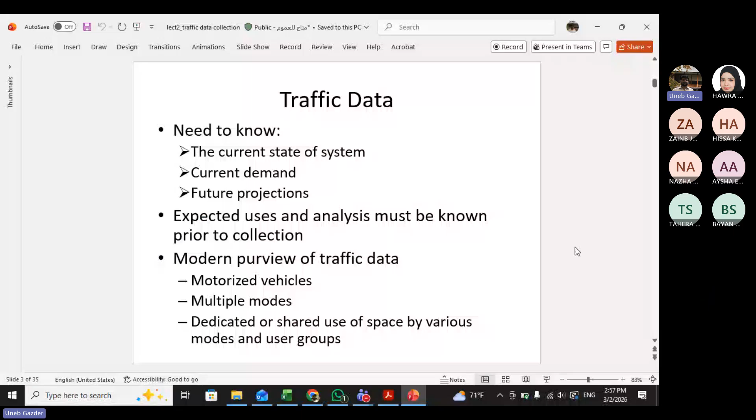We started the topic of traffic data collection. We looked at some of the sources and studies, and we covered a lot of them. Some of them were asked today as well in the quiz.

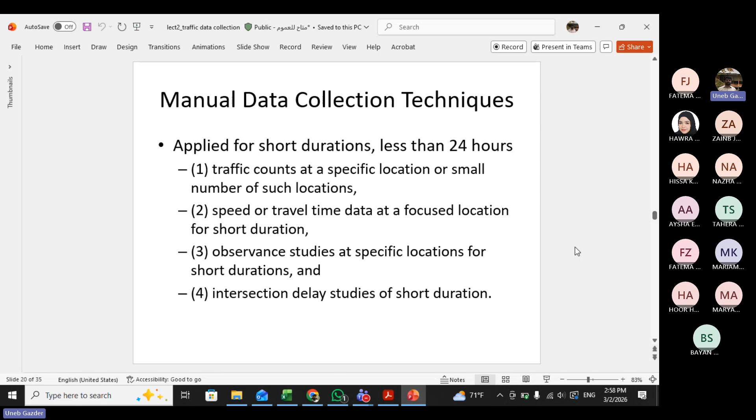We have three methods of data collection: manual, semi-automated, and automated. Manual studies are limited because the accuracy level is lower, so if we continue it for longer times, the error increases or multiplies. So manual studies are short and can be done for specific purposes, which are mentioned here.

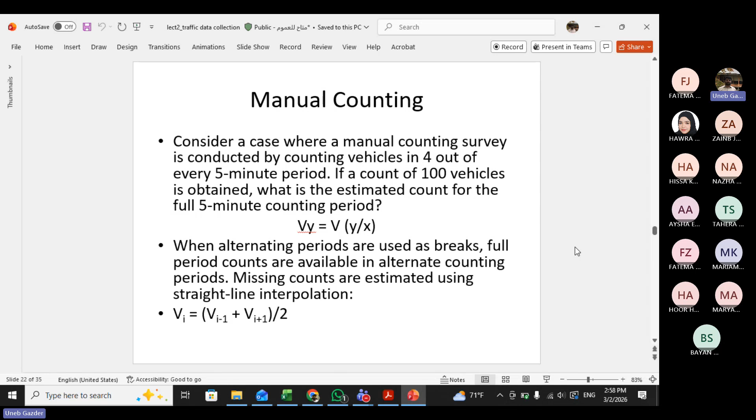We were talking about manual counting. Within manual counting, we talked about the concept of breaks. The breaks can be within the counting period, so a longer counting period, a shorter break period, and there's a total period as well. It can be alternate, so counting and breaks are of the same value, like 15 minutes of counting, 15 minutes of break, something like this.

We moved on to this example where we have two people counting 4 lanes. I told you if you do it lane by lane, the chances of errors are less because vehicles pass one by one, but the problem is we have fewer observers. So what they did was make a plan: 12 minutes counting for one lane, 3 minutes of break, then 12 minutes of counting for the other lane.

What I asked for last time was that you convert all these 12-minute counts to 15-minute counts. So you multiply these values, divide by 12, multiply by 15, and then fill in the missing values using the method of average. I told you how to fill in the first and the last value as well. So can somebody give me the values?

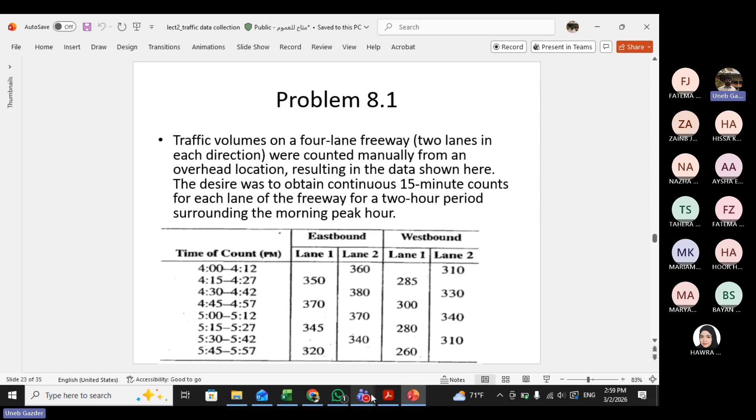The filled, complete table - somebody did that. You can simply share it on Teams. Somebody did the full table, the 15-minute counts and the filling in of the missing values. Does somebody have it?

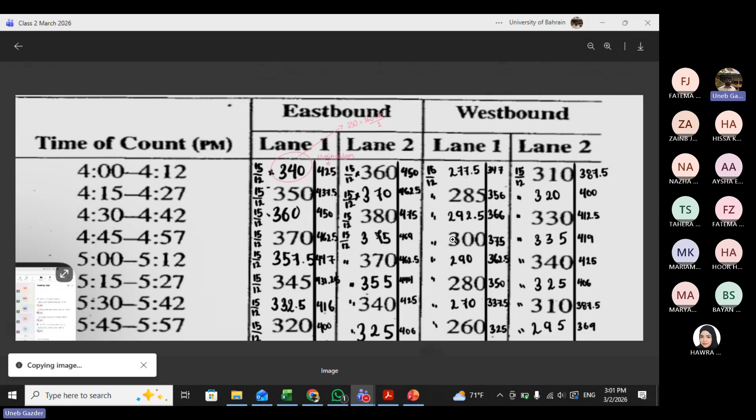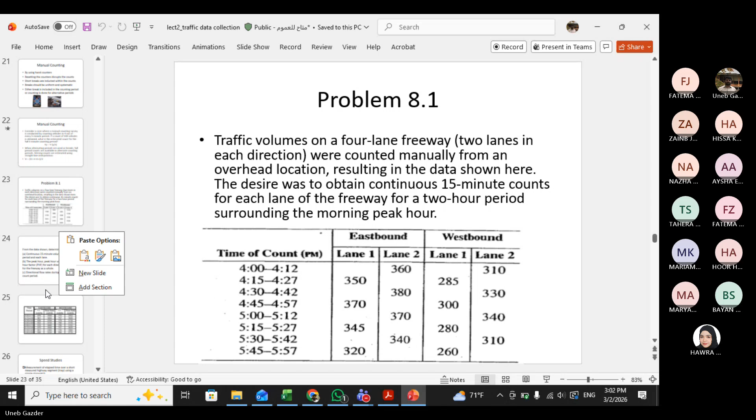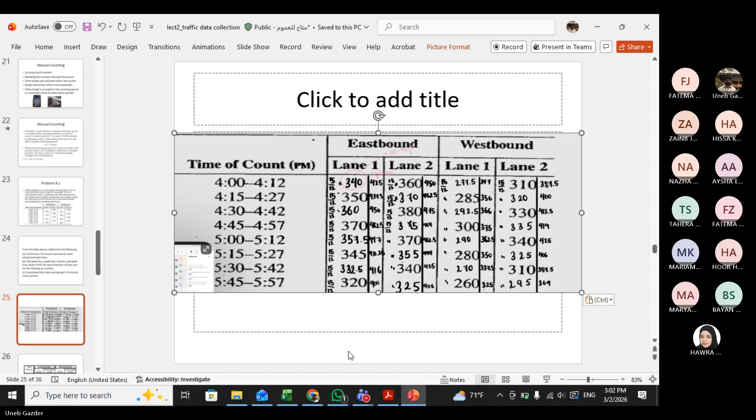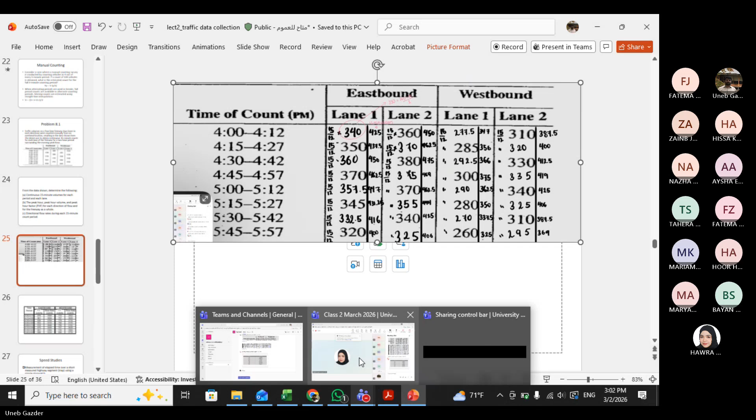You can still use it, copy it. Let's see. Okay, so these are the values you are talking about, the small ones. What is this?

What is this? Okay, the full question you mean? Okay, thanks for that. Okay.

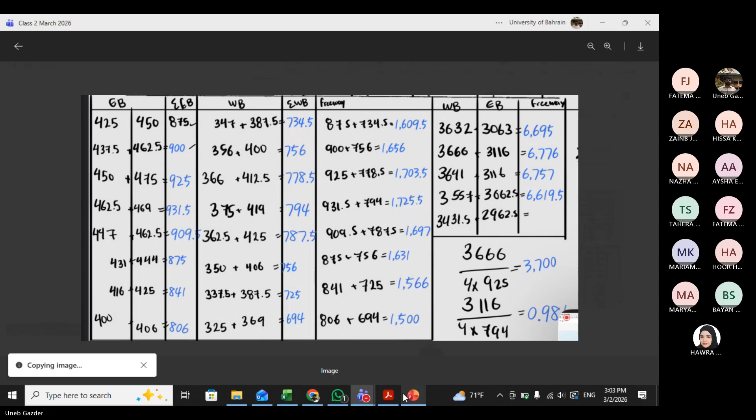What I can do, okay, for the others, I will recommend them to do it. But what I will do is explain the procedure for the remaining items, and then you can do it on your own whenever you have time. Okay.

Just checking if somebody else has it. Okay, no one else. Okay, so thank you, Bayan, for doing this. It's a great help, it helps me move faster. I'm always happy to skip around something like this.

So after doing the calculations I explained last time, you have values for every 15 minutes. So each of these values is for 15 minutes. 340 is from 4 to 4:15. Sorry, 425 is from 4 to 4:15, and 437.5 is from 4:15 to 4:30. So the values you see here are all for 15 minutes.

So she converted all the values using divided by 12 multiplied by 15, to get 15 minute values, and then found some of the missing values. Before doing this conversion, she did the missing value calculation.

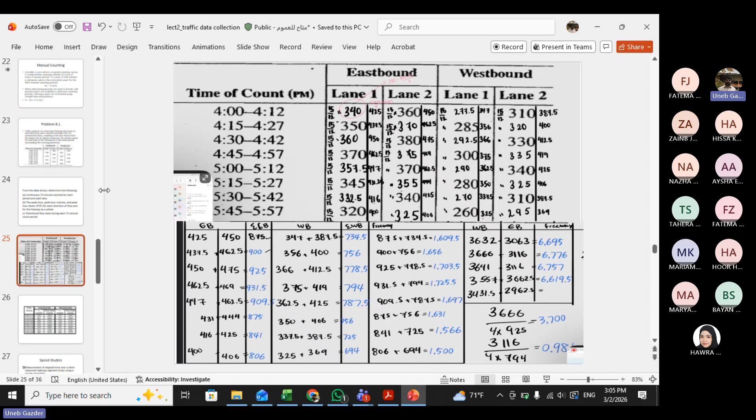So between 330 and 310, she found the missing value. Once you have these two values, you can find this one, because 310 should be the average of 295 and 325. So if you are missing the extreme value, you look for the previous two values and apply the formula of average. Okay, so once that's done, what happened?

Okay, pay attention now. It's very important. Once you have these values in the small columns, the next part of the question was to find out peak hour volume and peak hour factor for each direction and for the combination of both directions.

So freeway is the combination of both directions. What is done here is each of these values in the small columns is for each lane. Each direction has two lanes, so when you combine two lanes, you get the full of that direction.

So 425 from here, 450 from here, you get the total of this direction in this time, 4 to 4:15. Then 437.5 and 462.5, you combine them, you get 900, which is the total of this direction for the next time interval. The same thing for westbound as well.

So 347 plus 387, you get this one. This is the combined value. You take each lane's full 15-minute count and combine it with the next lane to get the direction total. This next column is when you combine both directions. This direction total was 875, this direction total is 734.5, you combine them to get this one.

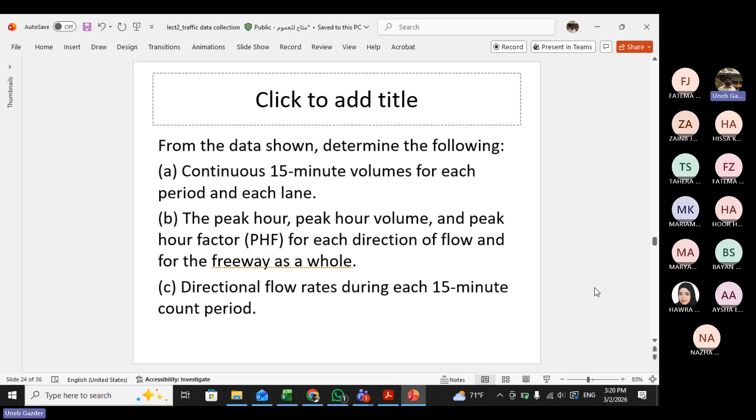These values in this table, because they did not say it for each lane, you can do it. All these values here in the first table in the small column are also flow values. They are also flow values, so I can convert them into flow rates as well. And these values are also flow values, they're also for 15 minutes. I can convert them into flow rates as well.

But they didn't say to do it for each lane, so I will do it for each direction and the combination of the directions. I'll do it for this part of the table. Now, if I got flow for 15 minutes, how do we convert it to flow rate? For that, you must know what is the difference between flow and flow rate. So if I have flow for 15 minutes, how do we convert it to flow rate?

Divide by 0.25, yes. Divide by 0.25, multiply by 4, same thing. So yes, you are right. Okay, so I pick all these values one by one, divide by 0.25. Any value which is 15 minutes can be divided by 0.25. It will be converted to 1 hour. It will become per hour, and then that is called as flow rate.

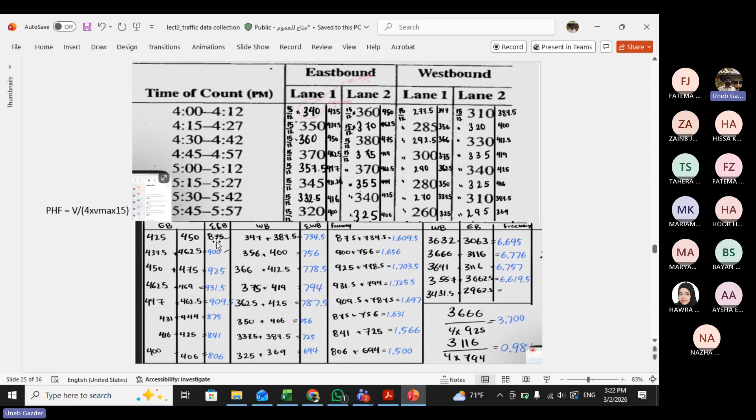So when you pick a value from 15 minutes and you convert it to per hour, that is called a flow rate. So this is what is to be done. So you pick 875, divide by 0.25. You got how much? 3500. You will see some small differences here from the values of the previous slide. These are rounding off differences. So Bayan got 875, I have 876. No problem. So if the value is 901 divided by 0.25, you get 3604. So this is called flow and this is called flow rate.

Okay, so there's a problem here. This is not per hour. So make this correction in your slides. These values are not per hour. These are per 15 minutes. We are converting them to per hour. The values are 15 minutes. We're converting it per hour. That is, after conversion, called flow rate.

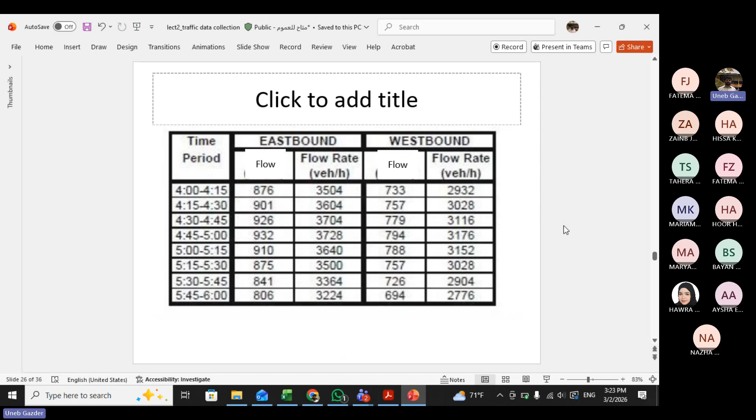Any questions? Anybody has any questions? Okay, so I can move on.

Moving on to manual speed studies. You can collect speed data using a speed radar. The one which the ministry uses for overspeeding is called a speed radar or a speed detector or a speed sensor. Some of these are installed on the roads as well near signals for yellow timing. But we are not talking about those speeds. Obviously, these are not manual. The instrument or the sensor is taking your speed data, so that is not manual.

Manual speed studies can be done in two ways. Either using distance and a stopwatch, some of you have done it for your projects, or using a speed gun. A good example of a speed gun is if you look into your app store or Apple store, you will see the app for speed gun. You can try it for your project or just for the sake of trying.

So yes, using a stopwatch has a random error, but to cancel it out you just need multiple observations. That's it. The other one is a parallax error. Before I explain the parallax error, I want to ask you, where did you see or hear about parallax error before?

In which other course did you hear about parallax error? Anyone? I can make it easier for you. In which other course did you hear about random errors? They were in the same course. Surveying, yes. Whenever I ask about another course, it's normally surveying or highway. They are very much connected.

So what is the parallax error? The error created by the line of sight is called the parallax error. What does it mean in speed studies? Normally there will be an observer on the side of the road. This is the starting point of the distance, and this is the end point.

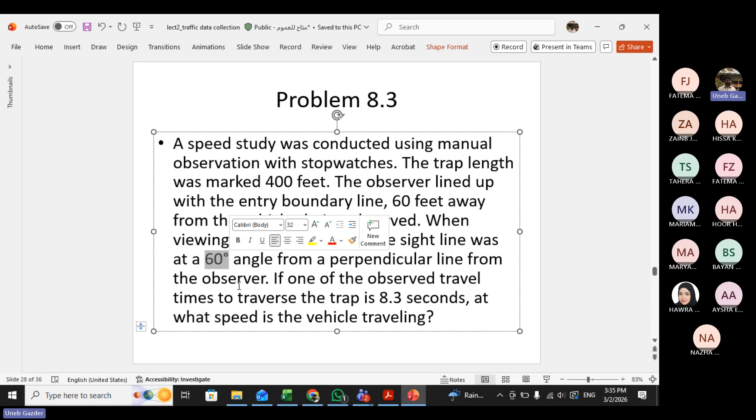Just an example. Now this observer in this position notes down a time of 8.3 seconds. From here to here, the car takes 8.3 seconds. To get the real speed of the car, I must find out D effective. So how do you find out D effective? For that, you need to look at this triangle: the observer, the starting point, and the position of the car.

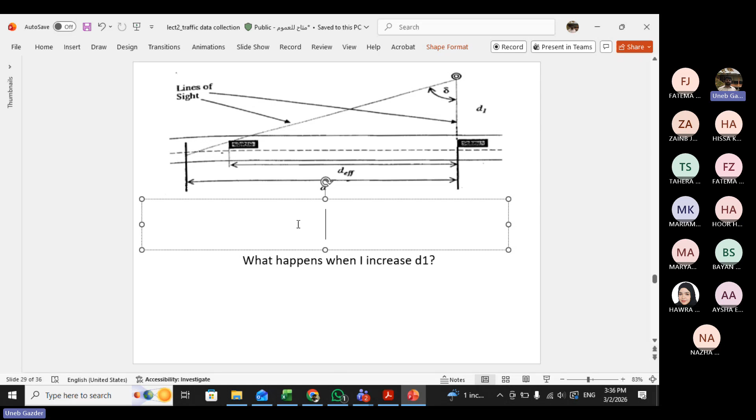This is a triangle. I have this angle. For this angle, D1 is my base and D effective is my perpendicular, since the angle is with the base. So we know tangent of the angle will be perpendicular upon base. Perpendicular D effective, base 60. The angle was 60 degrees and the distance is 60 feet. So that means D effective equals 60 times tangent of 60 degrees.

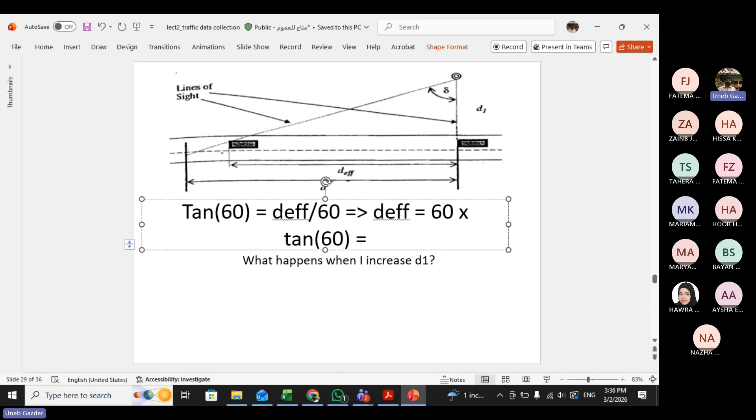So how much is my D effective here? 103.9. Okay. The time was recorded as 8.3 seconds. To get the speed, I should be calculating using this distance, not the actual trap length of 400 feet. Now you can see there's a lot of difference here. The actual distance D was 400 feet. The effective is not even half. So you can see how much problem it will create when you are calculating the speed.

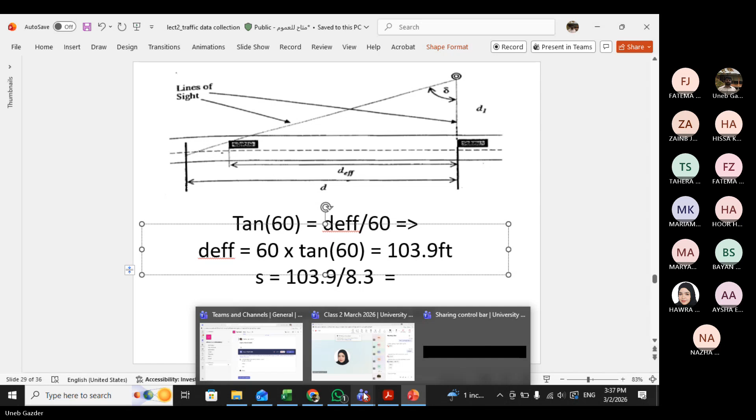So 103.9 divided by 8.3 seconds, and you get how much? How much is the speed? This is 12.5 feet per second. If you want to convert it into miles per hour, you will divide this whole thing by 1.47.

So you can see if I increase the value of D1, I will most probably increase my D effective as well. The angle you cannot play around with, but you can play around with the distance. When you change the distance, your angle will also change. So you can play around with D1, how close or how far you should stay from the road, and that will change the parallax error.

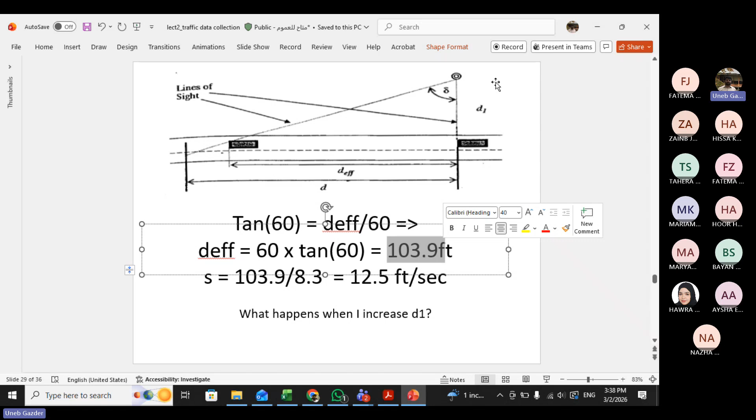Okay, so any questions here? Anybody have any questions?

Okay, just a couple of things you need to keep in mind, and this is important for your term project as well. One of the tasks in your term project, not from the first task, even for the second or for the final submission, you have to do another speed study. So keep these points in your mind when you are doing the speed study, the final one. The first one was a trial.

Okay, first of all, when you see a car is too fast or too slow, you don't measure its speed, because that's an anomaly. That's a very rare case. So we don't want to include the rare cases in my data because that will disturb the average. I told you random errors are cancelled out when you take the average. But when you take these special cases, everybody is going at 100, this one is an F1 driver going at 200, or this one has a problem in his car and he's going at 30 kilometers per hour.

So the fastest car, he will go and you will not even notice. You will just feel that, oh, wind has blown over your face. And the slowest car, everybody is abusing him and honking him and so on and so forth. So we avoid these cars because that will disturb the average. Average is disturbed, that means random errors are not cancelled out.